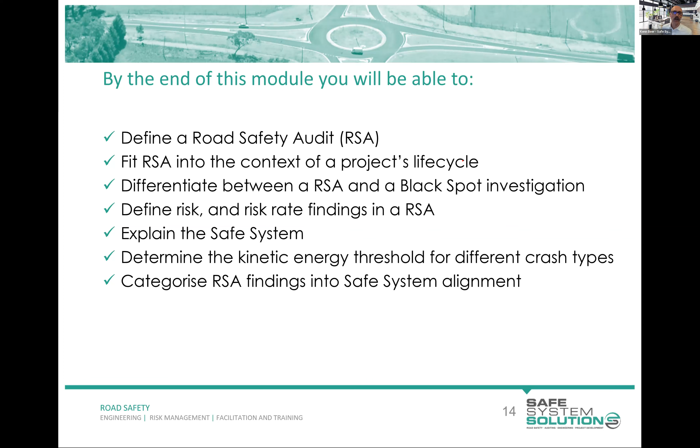This course follows the Austroads general syllabus for a road safety audit course, which is housed pretty much in the Austroads Guide to Road Safety Part 6, Road Safety Audit, which is this document here. I was the technical advisor to Austroads on that 2022 release of the document, working with a few people on that. There's been quite a series of these in the past, some of the superseded ones you can see there. But we will be following that process.

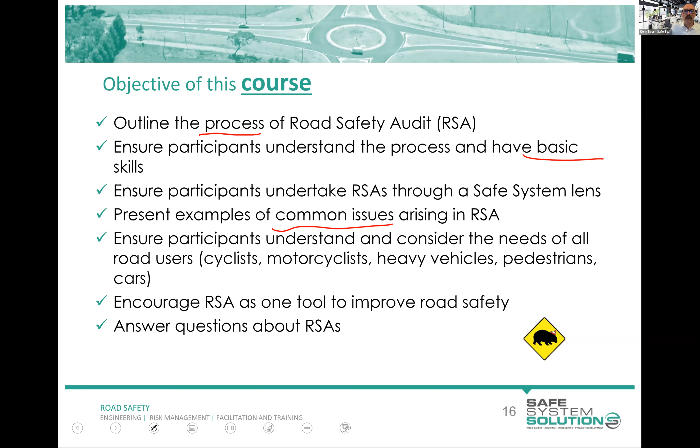Predictive techniques are more where you're taking crashes into account a little bit, and reactive are absolutely crash-based. So reactive techniques are often what people think about with road safety assessments, because they think, okay, there's been lots of crashes, or there's been a crash. Let's look at that and look at what happened, and then try to fix it.

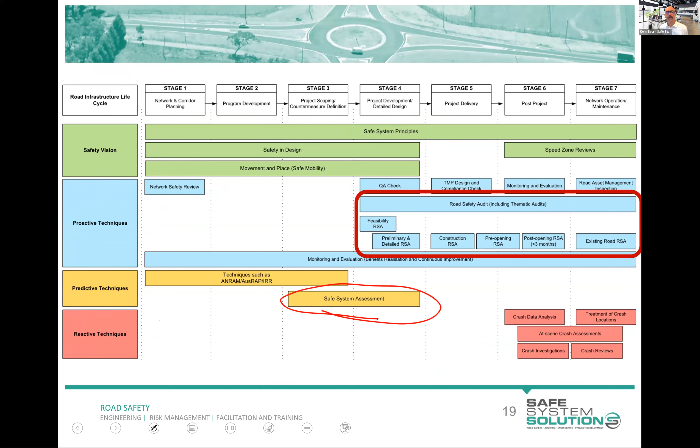We do interface a little bit with the Safe System Assessment Framework, but this is the road safety audit course. First, the most common misconception about road safety audits is that people think it's your job as an auditor to check that a design or bit of road meets all the standards.

And that is not what a road safety auditor does. The reason is that we know meeting all the standards does not necessarily equal safety. Why is that? You know, Austroads and Australian standards and local standards are surely good, but the reality is there's a few reasons why we know this.

Some standards have inherent deficiencies in them. They've traded off safety for other purposes, like mobility. Sometimes two standards in isolation all look fine, but when you combine them at a site, things go bad.

Another issue is there are many scenarios where standards don't exist - no standard or guidance on that particular thing. It could be an innovation, an area we've never used that particular thing in that scenario. So there are many circumstances where meeting standards could be unsafe, and many times where there are no standards or guidelines to follow.

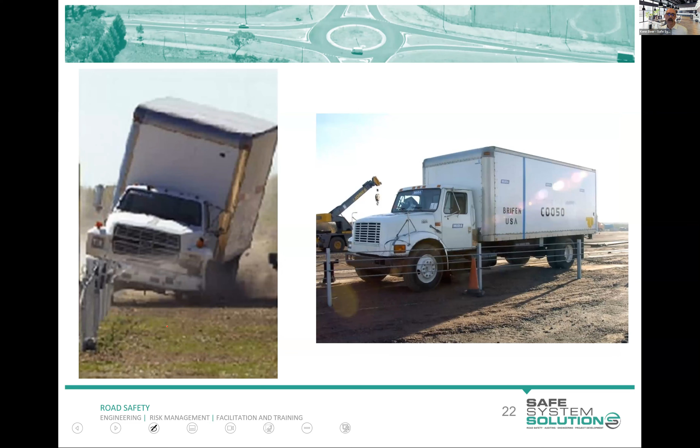So that's actually the test level 4 test vehicle. That's what we would expect it. And that vehicle we saw back there is going to be much heavier than that, especially if it's got cargo.

Let's do another little case study, because I think I'm really trying to hammer home this point of standards. It's not a check against standards, it's bigger picture thinking than that. So that one back there met standards. Let's have a look at this one here. So what we've got, some of you know this area. I'm using a couple of Victorian examples to kick us off, but we'll go other places, don't worry.

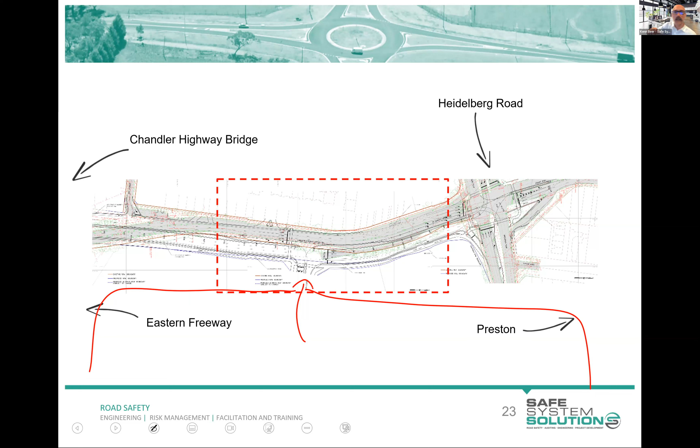We've got a massive new subdivision happening down here. Huge subdivision, apartments, townhouses, shopping centers, cafes. It's big. So they're building a new signalized intersection in here. We've got a bit of a duplication of the road happening as well, so an existing intersection here. So let's zoom in on this a bit. Okay, you can see down here, this is the new road that's being built, part of the subdivision. It's accessing onto this road with a bit of alterations.

And you can see there that little red square, if that was a car and say it was traveling at maybe 65 kilometers an hour, it's a 60 zone, but hey, that might be going a little bit fast. And they're ticking along and they're going straight through, and hang on, there's a right turn lane. They're just going straight along. They want to go straight through there. So that's what we would call a trap lane. If you're in a lane and without you doing anything, all of a sudden you are forced into a turn lane that you didn't want to be in, that's what we call a trap lane.

Trap lanes are something that is discouraged in guidance, but there is nothing here that does not meet a standard, okay, well, associated with that aspect of it. But again, we know that this is going to cause side swipe and rear end crashes around there. It's just, we know that. Now, our job as road safety auditors is to point that out.

Now, for a job like this, the designer is going to know that they have designed a trap. Pretty confident of that. This is not some accident that they've missed. I think the previous one, it was more probably they just didn't think through the specifics of larger vehicles, breaching it, hitting those specific things. There would have been some thought of that, and there would have been barrier design. But this one's more of, it was a conscious decision.

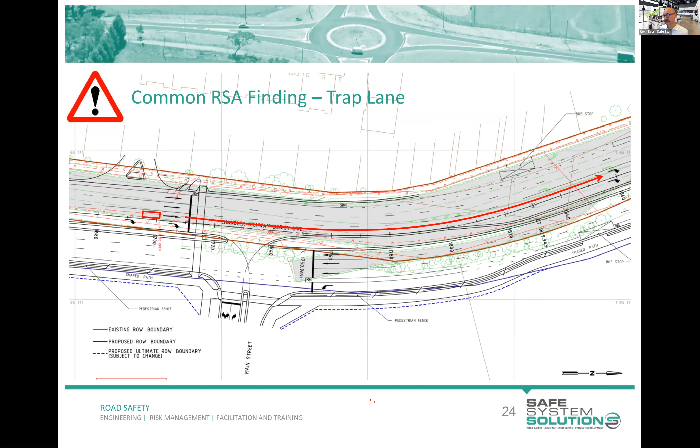All right, I'm going to give you a little exercise to do here. Before that, Marissa, I'll see if you've got any questions, but let me explain what we're going to do. I'm going to play a crash here. Nothing graphic, but there is a crash that's going to come up. Now, a road safety audit is not a crash investigation, so that's not road safety auditing. But what we're looking for are the features and characteristics of the road environment that may have influenced this crash happening. What features are there that may have made it more likely for this crash to happen? So, Marissa, were there any questions before I play this video?

No questions. We do have a comment from Paul: on Eastlink, surely heavy vehicle percentages would be fairly high and fully loaded - trucks and trailers more likely to be 30 to 40 tons.

Yeah, I think it's a really good point. It shows you that sometimes these standards or ways of operating and decisions made don't really consider the real world situation, or haven't taken things into account. Road safety auditors are one of the ways that we can address that. These days, in most jurisdictions, you'll find a requirement for higher containment around gantries that go over the road especially, and for a very long time, bridge piers and the like have required much higher containment barriers around them, where there's that catastrophic failure potential.

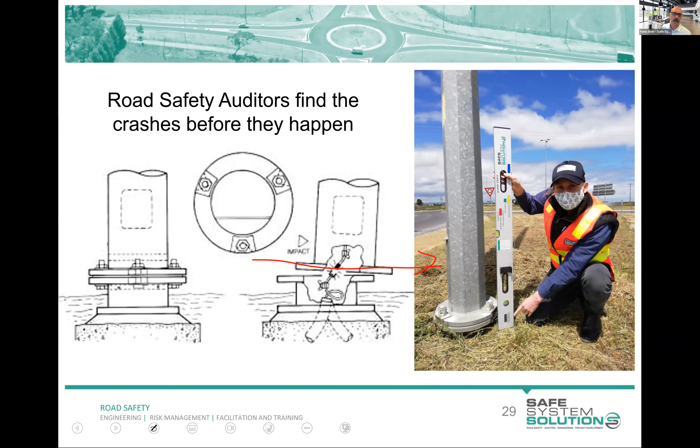And so as a road safety auditor, you'll probably be given a set of designs at some point, and you might get the full design set. You might get 50 pages, 100 pages of geometric, long sections, cross sections. You'll get the pavement plan, the drainage plan. You'll get the lighting plan like it is here, and you'll look at that and you'll think, okay, are we going to get any visual deceit at night? Is it going to make people think the road goes a different way? You'll also be thinking, oh, gee, what light poles are they using? And what's this environment? Are they using slip-base poles? Are they using rigid poles? Are they using another type of pole? And trying to understand what the implications of that are.

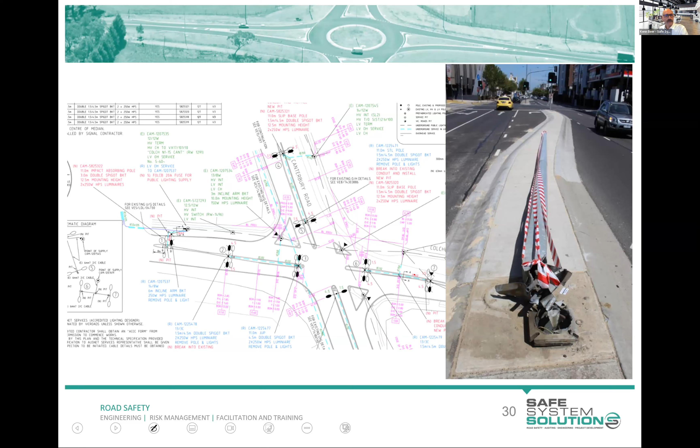So let's take this little bit of road environment down there in Abbotsford, Richmond. What about if they were to say, hey, yeah, we're worried about vehicles leaving the road, so our design has this one as a slip-based pole. What would you say to that as a road safety auditor? When you're looking at the design, you go, okay, they're using a slip-based pole there. It hasn't been built yet. Imagine that you're seeing it as a design. What would you be saying?

Oh, look at this. Marissa, two in, and I'll take those first two and give prizes. I think we're going to run out of prizes, Ken. Good. That's what I like to hear, because it means people are getting involved and coming up with good answers. And you've got to be quick here, it looks like.

We've seen danger to pedestrian. Yeah, so we've got to think about where that falls. And overhead cables is a good one as well to have a look at as a road safety auditor. So tram lines, power lines, and where are they going to fall?

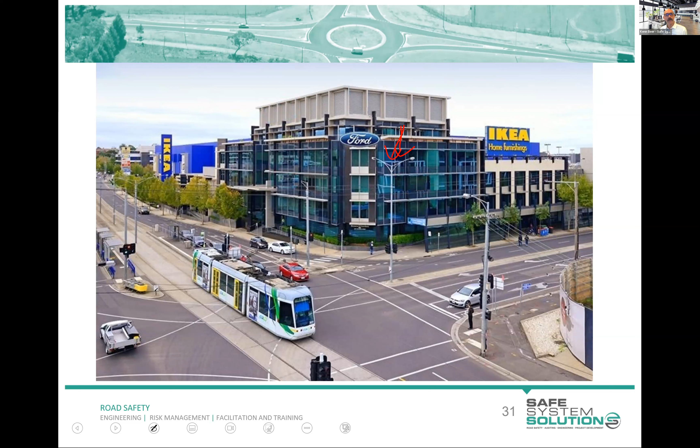Okay, so what we then have to do as a road safety auditor is think of all of this in context. And that's really what we all need to do across road design, management and everything - think about context. But we as auditors think about our risks within context. So in this context, slip-based poles would present a risk for pedestrians, for those power lines. It's probably not the appropriate treatment to be using at that location.

There is this other type of pole, which is categorized as frangible. I will give a prize out if anybody can tell me the name of this type of pole. But what it does is, instead of shearing at the bottom, it captures the vehicle, as you can see, in a contained envelope. It is certainly more forgiving, and it is an impact absorbing pole. That's good knowledge. Well played. Impact absorbing, prize there, please, Marissa. It contains it in an envelope.

But your rules of thumb are: low speed environments, especially if there's pedestrians and the like around, use a rigid pole, because your speed is low of vehicles, and we're not going to see a lot of serious injury and fatality to the occupants of the vehicles. Their speed's low enough with that rigid pole. Medium speed environments, you're looking at these impact absorbing style poles, and high speed environments are certainly into your slip-based poles. So again, as auditors, we can be injecting that thinking in and helping out. Now, a designer may come with absolutely good intentions, putting a slip-based pole in an area where we're concerned it's going to land on a bus stop or an area where pedestrians are waiting and the like.

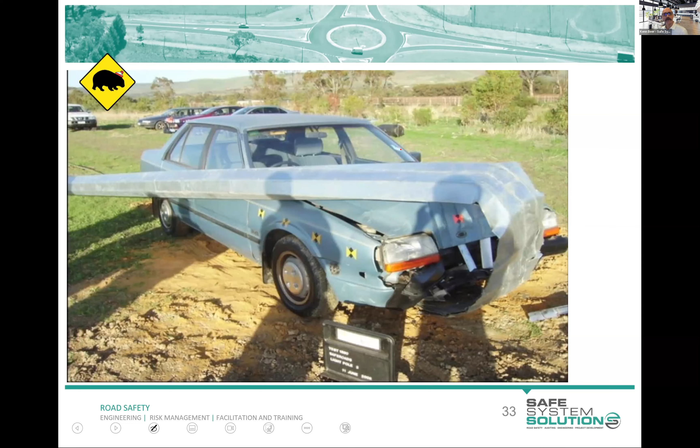So a couple of little tips here, and you'll see these little info things pop up. You can download an electronic copy of these notes, and if you click on these, you just get some extra information snippets, videos of vehicles crashing into slip-based poles and the like.

Some issues you'd look for as a road safety auditor: where are they going to fall? But also, if you're doing an existing road or a post-opening audit, as our auditor here, Max, is doing, he's out there with a colleague doing a post-opening audit of this roundabout, checking the height these were installed at. Because if you make that too low, well, too low is not as bad. Too high, vehicles snag on it, it's useless from a slip-based perspective. Too low is not great, but you can live with that a bit more. There's easily available information about the height it should be.

So if they selected the right pole, where's it going to fall? What's the height of the shear plane? Now, I just use that as one example of limitless possibilities of things we could be thinking about as auditors. It's one where it's nice to understand the technical nature of it, but also the logical aspects, and this is what we want road safety auditors drilling into. It's one I see come up a lot, especially that selection of slip-based or not, and where it would fall.

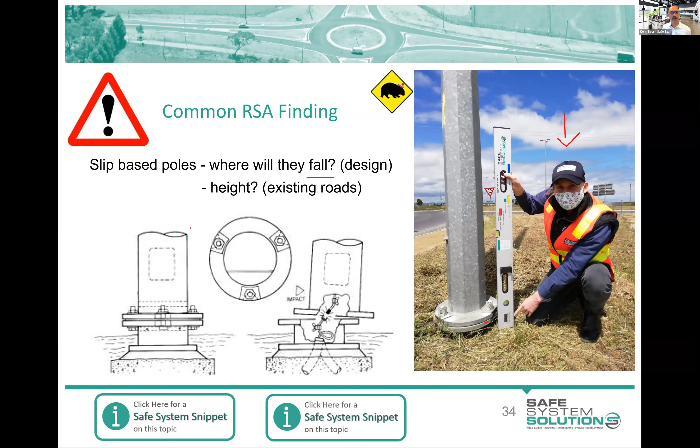So road safety audit is proactive. If you have a location with a significant crash history and you're asked to investigate that site, looking at all the crashes in detail, understanding what happened, you are doing what we call a black spot investigation. It is different to a road safety audit. They share a lot of the same thinking, and are best done with people with the same training and knowledge, but they are different processes.

A question that often comes up is, should I, as a road safety auditor, look at the crash history as part of my road safety audit? The answer is, it's up to you. Some people don't like that, but it is up to you. Austroads avoids answering that definitively. I have worked with road safety auditors who say, I do not want to see the crash history. And I've worked with auditors who say, yeah, absolutely, I want to see the crash history.

The reason some say they don't want to see the crash history at all is often because we're doing a design stage road safety audit. They say, what use is the crash history? They're fundamentally changing this whole setup. Why would I be influenced by what's happened on a completely different road setup? I'm going to look at this new design and imagine and predict what's going to happen, and that's what we're going to report. We're not going to be swayed by any crash history. Also, they'll often say, well, if a place doesn't have crashes, it doesn't mean it's got no risk. So I'm not going to look at crash history. I don't care about that.

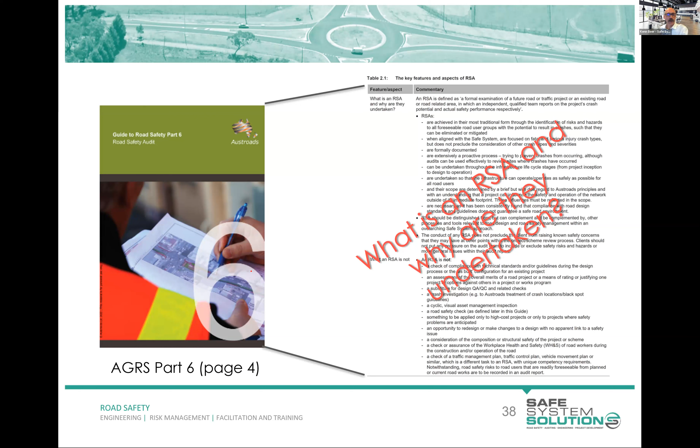I'm not going to read you a page. You can read it yourself because you can download a copy of the Austroads Guide to Road Safety Part 6 freely from the Austroads website, as all Austroads guides are. They are free, you just need to create a login, and there's wonderful information there. You should, if you aren't already, make sure you get onto that. But let me take one little bit of this.

A road safety audit is a formal examination of a future road or traffic project, or an existing road or road-related area, in which an independent qualified team reports on a project's crash potential and actual safety performance respectively.

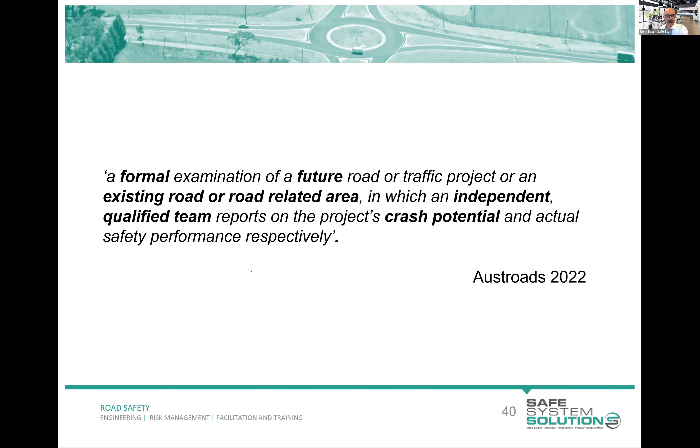Let me bold a few really important words here. It is formal. A road safety audit is a formal exercise. It's a set process, there's a way to present it, you sign it off at the bottom, you've got steps to follow. It's a formal process. Future road or traffic project, so that's designed, or the existing road or road-related area, independent.

You cannot do a road safety audit of your own design. You cannot do a road safety audit if you are the project manager, or even if you are the overarching manager of an area where the project is happening within that sort of area. You can't be doing the road safety audit. You must be independent.

You have to be qualified, and you're going through one of the important processes, doing a course, a recognized course, and then getting your accreditation of that jurisdiction. I'll take you through all of that in our last module. And we're thinking about crash potential.

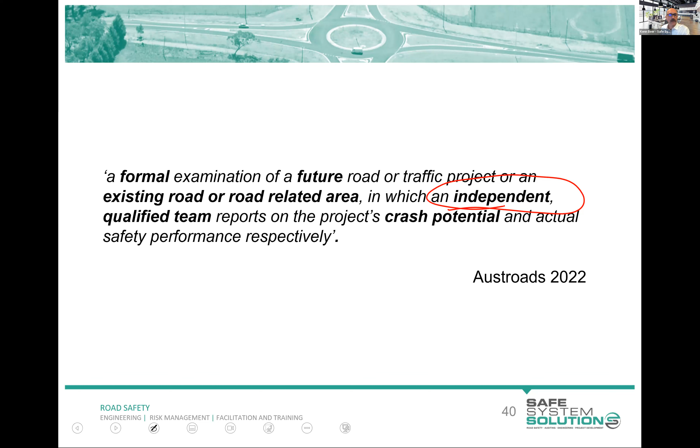So we want to ensure that we follow this safe system approach. Some of you have heard this a thousand times, but I'm going to say it again in case anybody hasn't, or just for reinforcement. We are now in a space in the design, the management, the operation of the road system that we do everything we can to stop crashes happening. However, we acknowledge that even when we get everything right, people are still going to stuff up. They're going to make mistakes. And we need to then understand what is the severity of that.

What's going to happen? We have a responsibility as designers, as engineers, as auditors and the like. We do want road users to act as appropriately as possible, but we recognize there's limitations because, hey, they're human, and humans stuff up and do silly stuff. And that's what we are designing our road network for currently. When we get to design it for computers and machines only using the road, great - different thing, different way to look at it, different way to design it. But for now, and for quite a long time, it's humans we're designing for. You can design a little bit for machines, but we won't get into that in this course.

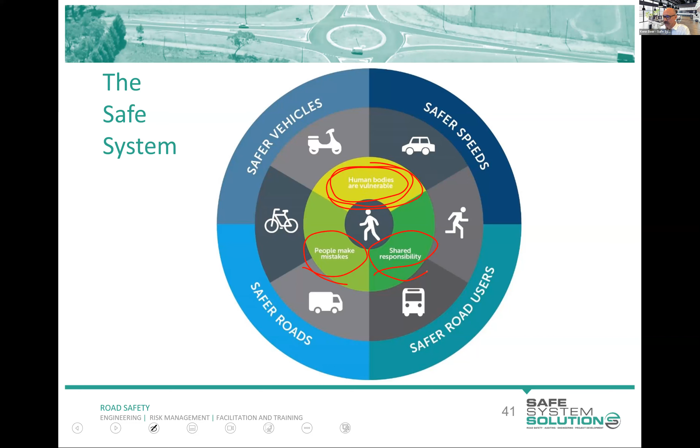So really key principles - we're aiming at no death and serious injury. We know that's not going to happen tomorrow, but we've got to think and aim for that, and stop just saying, well, it's an inevitable cost of transport that some of the community get killed or seriously injured. We challenge that whole premise. People make mistakes, we've got a shared responsibility, and we know that there's a certain amount of force people can take.

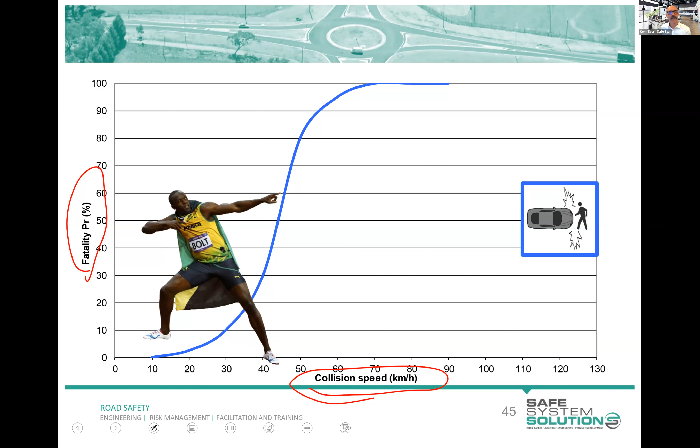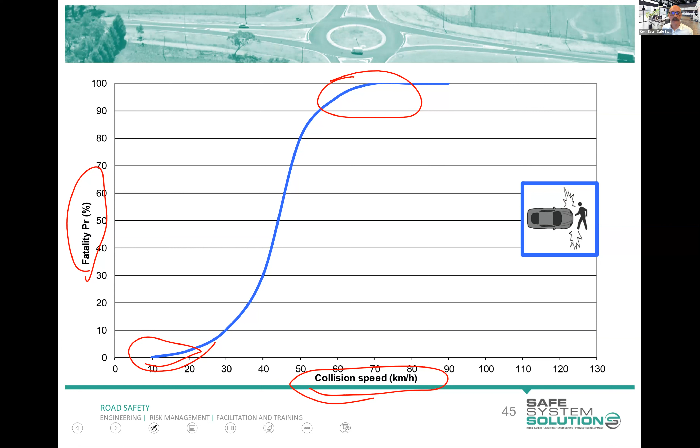So we see there that for our entire community, not just Usain Bolt, this is everybody. When we have very low speed, 10, 20 kilometer per hour vehicles hitting pedestrians, most people survive. When it happens at 60 or 70 kilometers per hour, most people are killed. There's going to be situations at either end which are anomalies, but that's the general trend.

This is what we're designed for. Yeah, he survives, there's got to be a few broken ribs in there. Yeah, he did break some ribs actually, and came back and won the gold medal the next year. So we can survive off the speed of our own legs. But we, of course, are propelling things and propelling ourselves around the transport network beyond what we were ever evolved to survive, and so we need to have a think about that.

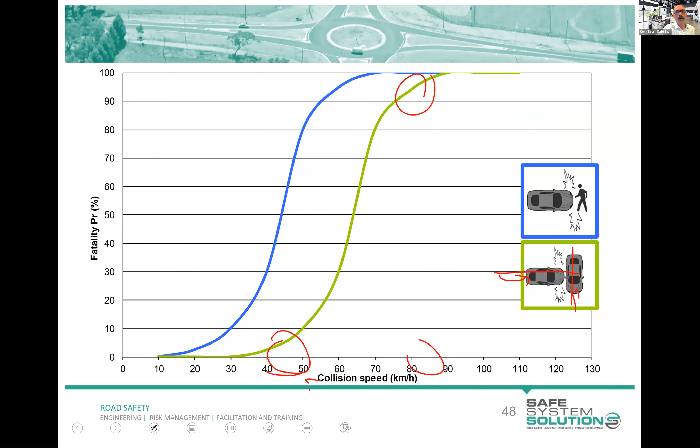We have this information for some other crash types. We have side impact crashes, so that's the bullet vehicle - the bullet vehicle is the one that does the damage - and the target vehicle. This is bullet vehicle speed. Bullet vehicles around 40 or 50 kilometer per hour in a right angle crash, it's fairly survivable. Up at sort of 80 kilometers per hour, it's not survivable for the occupants of the target vehicle. And head-on crashes, it's somewhere around 70 kilometers per hour speed of each vehicle, where we see things go really bad really quickly.

So in a road safety audit and in safe system thinking, we talk about a threshold speed, and it's this line here: 30 kilometers an hour for pedestrians, 50 kilometers per hour for side impact, 70 kilometers per hour for head-on crashes. That's where things start to go really bad really quickly after that speed for those crash types. So that's what we talk about - is that within a safe system threshold speed for the crash type we're worried about?

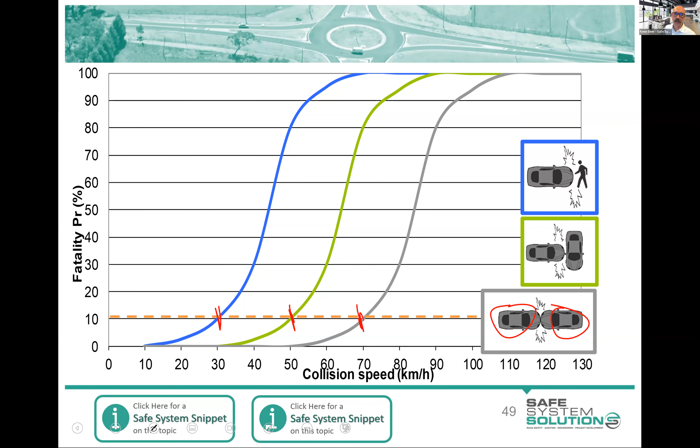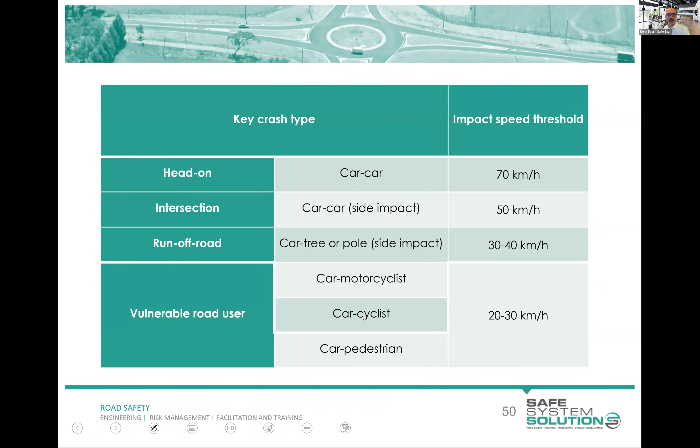There's some safe system snippets, links. If you download the PDFs, you can have a look and read in a bit more detail about this, and there's lots and lots of continued research going on to this, but these are a pretty good starting point. I've given you a few more here, and a few more sort of impact threshold speeds for different crash types, and you may be referring back to these at different points.

Okay, so we're sort of getting our head around what a road safety audit is. The old model of road safety auditing just said, okay, find the risks in the design or the existing road, make some assessment of how bad, how much of a risk is this, and then recommend some changes. Nowadays, we have to do a little bit more. We still identify those risks, we still assess them, make a risk rating, but we sort of consider that safe system tolerance. When we're assessing that risk, are we talking about fatalities here, or are we just talking about minor injuries? I'll show you why, even though we assessed risk back here, it's slightly different.

And then we want to recommend safe system aligned mitigation measures - things that are going to actually see fundamental risk reduction. The easiest way for me to explain this is just run you through an example from start to finish of an audit finding and recommendation, meeting the Austroads guide.

So here we go. This is a new intersection being proposed. It's a design, there is no intersection there at the moment - this is a new intersection coming in. It's got a left turn lane here, it's got a through lane here. This is a high-speed road, an 80 or 100 km/h road. You can see there, it's all set up, being designed, it's all looking pretty good.

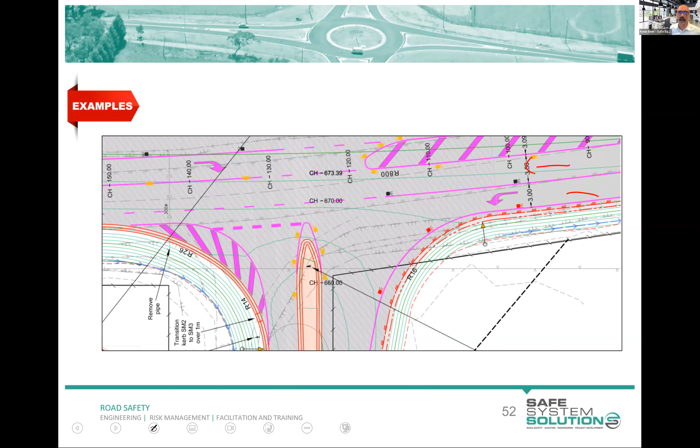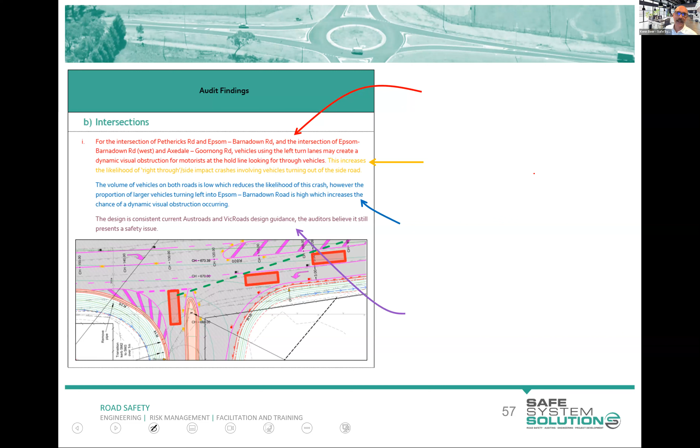The red is the issue. So for this intersection, blah blah blah, vehicles using the left turn lanes may create a dynamic visual obstruction for motorists at the hold line looking for through vehicles.

Then the yellow is the crash, okay? This increases the likelihood of right through side impact crashes involving vehicles turning out of the side road. You spell out the crash that you're concerned about.

Even if it's blindingly obvious to you, you spell out the crash that you are concerned about. Okay? If you can't actually articulate a crash, it's not a road safety audit issue. If you're worried about drainage off the side of the road in the carriageway, flooding houses, okay, what is the crash? Can't find the crash, it's not a road safety audit issue.

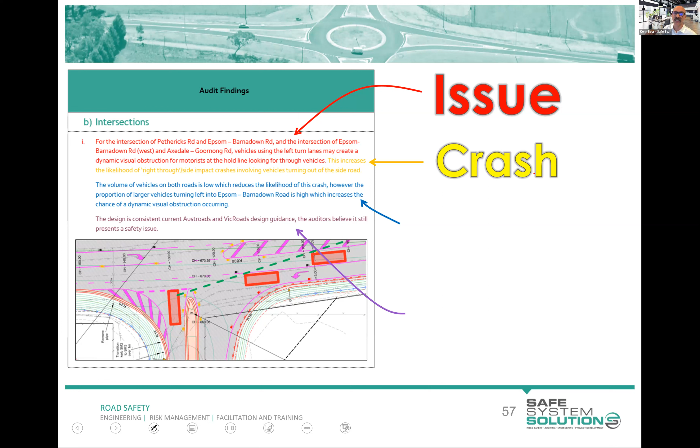Maybe it's a drainage issue, and maybe you want to shoot an email to the designer and say, hey, I reckon you're going to have some significant drainage issues. If you can't relate it specifically to a crash, not a road safety audit issue.

Then the blue is any factors that may increase or decrease the risk associated with this site in this context. The volume of vehicles on both roads is low, which reduces the likelihood of the crash. However, the proportion of larger vehicles turning left into Epsom Barnadown Road is high, which increases the chance of dynamic visual obstruction occurring.

And the last thing is any standards or guidelines that are applicable. You don't have to do this, okay? But if you know that it doesn't meet a standard or a guideline, this is where you would say it.

Now this one, interestingly, the audit team has done something which isn't as common, but it's decent practice to do it. The design is consistent with Austroads and VicRoads design guidance. The auditors believe it still presents a safety issue. So there you go, they're already going, yeah, we know you've met standards here. We're still concerned, okay, that's an interesting one.

So that's a good, nice write-up of an audit finding. Issue, crash, risk factors, standards or guidelines if applicable.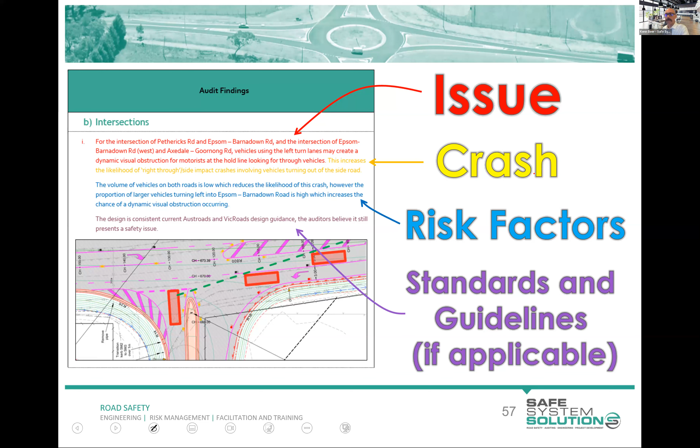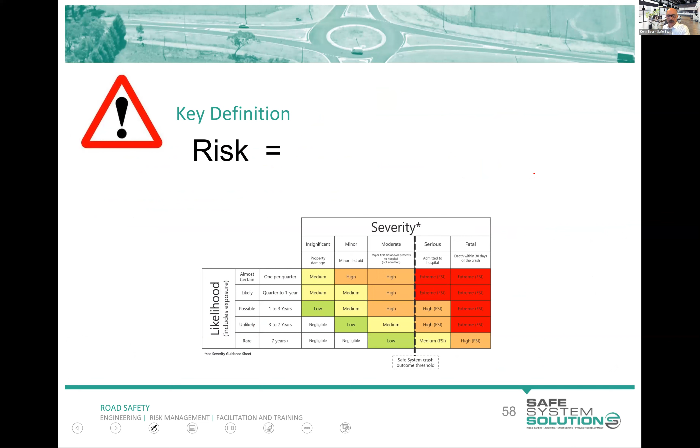So then we need to give it a risk rating. We've explained it, now we need to risk rate it. Is this low risk? Is this high risk? What are we talking about? And the formula for risk is the chance of the crash, the likelihood, multiplied by the severity of how bad it's going to be. Now, for those who have done safe system assessments, we extract exposure out of likelihood.

And you can see here, actually, go to the next page. You can see here, this includes exposure, which we added in the most recent thing to just clarify that.

This is straight out of the Austroads Guide to Road Safety Part 6, which we've updated since earlier versions. I was never involved in the first one back 25, 30 years ago when it first came out, and I've never liked it. So this time I made sure we updated it.

What we can see there is that you try to find, okay, you're imagining a crash that could happen. So on this one, we're imagining that dynamic visual obstruction, that side impact crash. We're saying, how often is that crash going to happen? Is it once every quarter, or less than once every 7 years? And when it does happen, what are we talking about? Is it going to be insignificant, just some property damage, or is it going to kill somebody, or where does it sit?

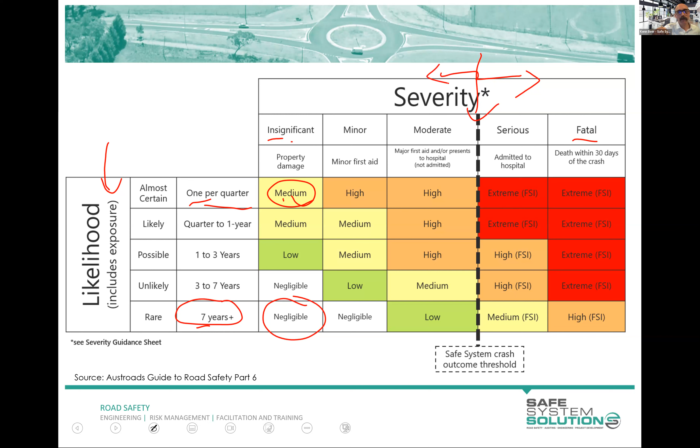Then you find your corresponding risk. So maybe once a quarter, insignificant, we put that at medium. Or 7 years, insignificant, we call it negligible. You find this corresponding risk, and you see this line here - anything to the right of that, we're very concerned by. Anything to the left of that, we're still concerned by. But if we have a high risk here versus a high risk here, this one is more concerning because of that FSI, which stands for fatal serious injury. The objective of the safe system is to eliminate that fatal serious injury. We don't want it, but if we had to, people having moderate injuries that they recover from is more acceptable.

Now, Marissa, are there any questions coming in at this stage? Yeah, absolutely, we have a couple. Would you reference speed limit which impacts consequences?

Yeah, you would definitely be. That would be a big influence on the severity of crashes or consequence of crashes, and the speed things are going to happen at. Absolutely, so speed limit, operating speeds, or your prediction on speeds can be very useful and can be added in there.

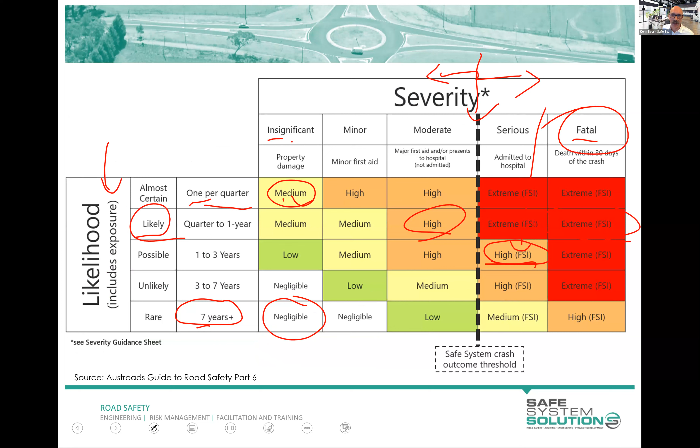So you can sanity check yourself by working backwards. Because if you've said, for example, I think this is likely fatal, extreme risk, if you come back in 5 years' time and they build it exactly the way it is, you're thinking there's going to be a minimum of 5 people killed, or could be more than 5 fatal crashes as a result of that at this location because they built it exactly that way because of that particular issue.

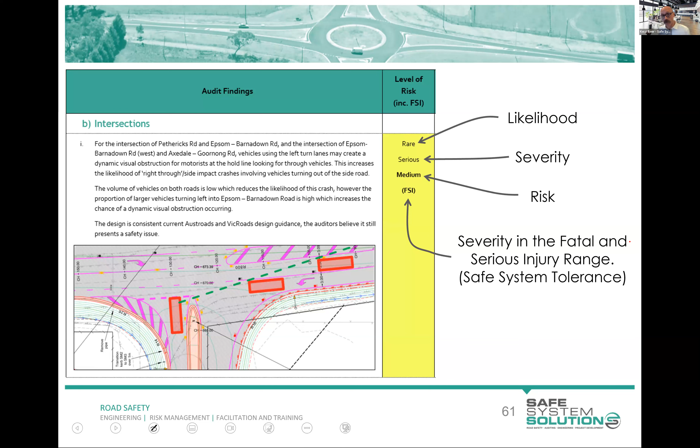Now, I would say that's over-risk-rated compared to what industry would say on this. Anyway, but I keep ticking on. And Marissa, hopefully you're getting assignments ready for everybody.

After we've risk rated it, we need to suggest how we can minimize that risk. How do we bring that risk down? We can do that in many, many ways. So how do we help the person receiving this report know which would be better to do, and which would be okay, but not the best?

Well, we do that by putting a little categorization of any treatment into either a primary treatment or a supporting treatment. I want you to think of these as little buckets or bags of treatments. In the primary treatment bucket, there might be a whole lot of different things they could pull out and use. In the supporting bucket too. It's just that the primary ones are our big ticket items — they virtually eliminate the potential for fatal or serious injury crashes occurring, associated with foreseeable crash types. Types is the important word there, crash types. Supporting treatments are good, they reduce risk, but they're not expected to virtually eliminate the potential for fatal or serious injury occurring.

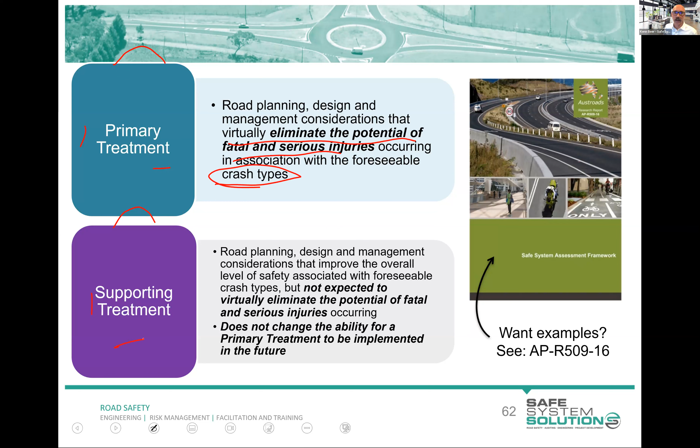So let's have a look at this, and we go back to our one here. Implement measures to reduce speed and/or angle at this intersection — this could be achieved with a roundabout, which is a primary treatment. If this cannot be achieved, implement measures to improve sightlines at this location, such as increasing the offset of the left turn lane, opening up sightlines — that's a supporting treatment. Relocating the hold line forward, provided that can be done safely — also supporting. You could have 3 primary treatments put in there as your recommendations, you could just have 1 primary treatment, or you could just have supporting treatments. It's just helping whoever reads this know which the big ticket, best ones to do could be. But you'll note there that there's a few things.

They've given some options — I like that. Some auditors aren't so keen on giving options; they just say, no, this is what you should do. I like doing it this way because it's not our project, we don't know all of their constraints. In fact, they're probably locked into a budget and locked into a land area. And the idea of that roundabout, while it is the primary treatment that would really fundamentally eliminate this risk, they probably can't afford to do it and probably can't get it to happen, right? But I don't want to ignore that, and I do want something else there.

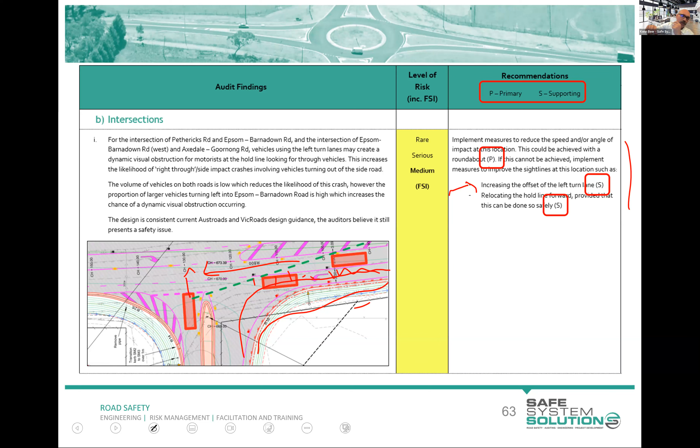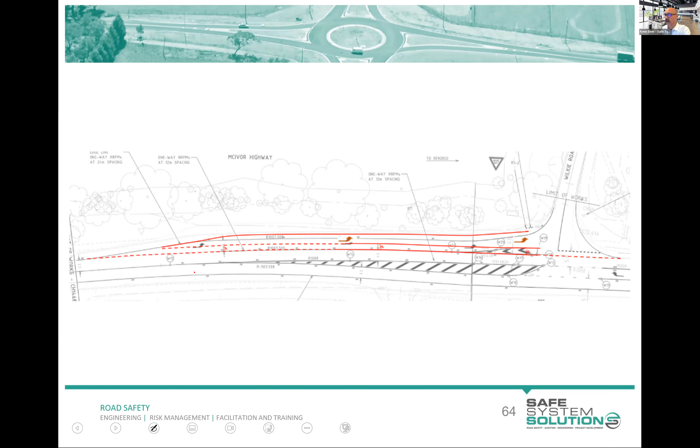I was reviewing two colleagues who had done a road safety audit, and they were very nice and extra helpful to the designers because they sketched up this little option to open up that sight line for the dynamic visual obstruction issue, and made it a cycle facility as well. I thought that was quite a neat little way to do it.

So a little tip: for something to be a primary treatment, it's really got to address the consequence of the crash through speeds, angles, barrier systems or the like, or it's got to virtually eliminate the possibility of that happening, but you've got to account for human error. So it's very hard to get that second one in play.

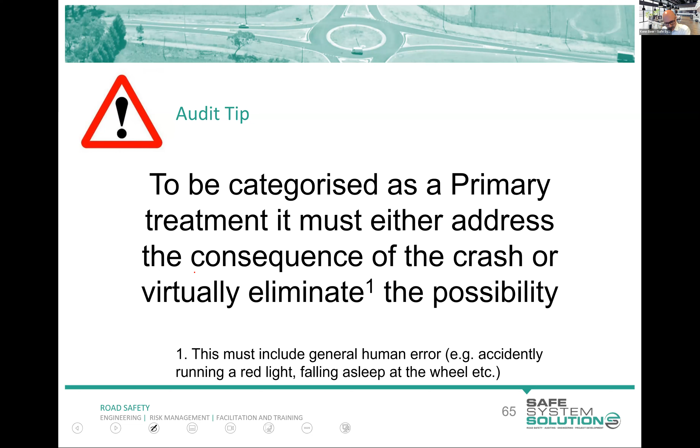You're probably going to have some challenges getting your head around this primary/supporting distinction. You're going to have a quiz later on, which is going to help you with some of that. You're going to get more examples, some practice, and some feedback. We'll work you through that.

So in your road safety audit, you'll always leave some blank spaces there for somebody to deal with that audit report. We hand it over, we want them to do something with it. We want them to look at this and go, oh yeah, that's an issue, we should do something about that. Or they can say, I disagree, okay that's fine, that's up to them. We don't have any legislative power as road safety auditors.

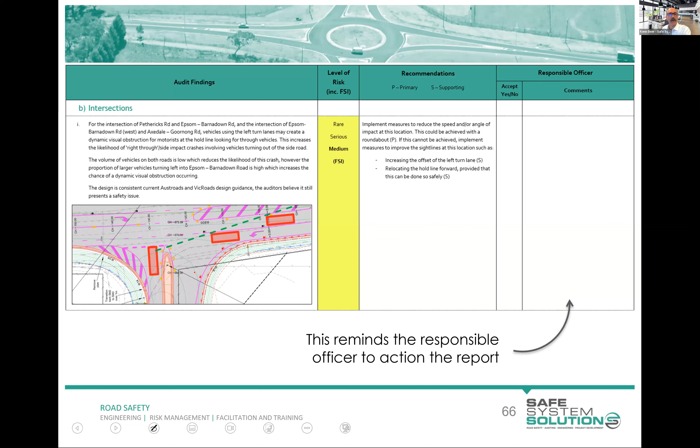We're not there, they don't have to follow what we say. It's not a good look in court when a road safety audit report said something and they didn't do anything, but they don't have to. My tip for anybody who doesn't follow what a road safety auditor has put down is to just justify why you're not doing it, and then that's seen as okay.

So there was an example, and I'll probably just jump through this one. I won't read it all out, but I love that straight away I know what the issue is: the 2.9 metre wide right turn lane. That's going to cause some sideswipe issues and possibly some rear end issues. And that's because they snipped the design, I know exactly where it is.

They pointed at it, I know what the concern is, I don't have to read this. And that's really important. They do, though, if you read it in detail, break it up into those specific recipe or formula elements I talked about: the issue, the crash specified, the risk factors. And this one has discussion about what Austroads actually requires, because it doesn't meet the Austroads guide to road design.

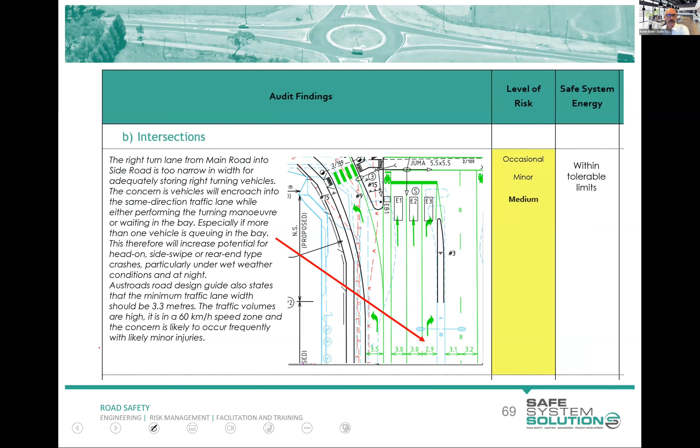I'll jump through that because we're a little bit out of time. There's another Wally—keep your eyes peeled for Wallies.

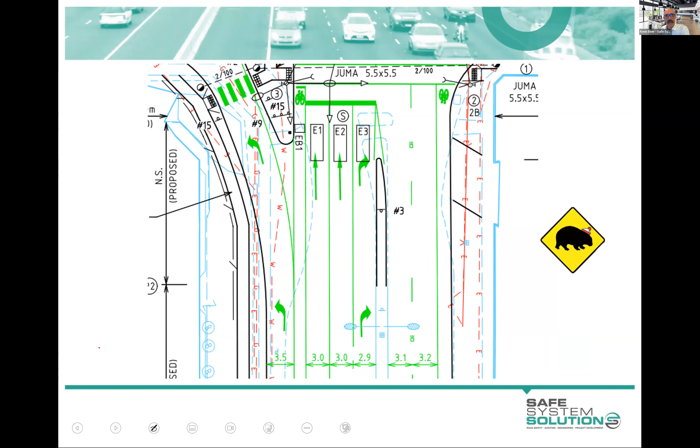Yeah, what we often see road safety auditors doing is very poor practice in terms of writing up a road safety audit. For example: 'right turn bay is too narrow.' Too narrow for what? Which right turn bay? I've got so many unknowns about that. That's just going to be annoying for whoever gets this report.

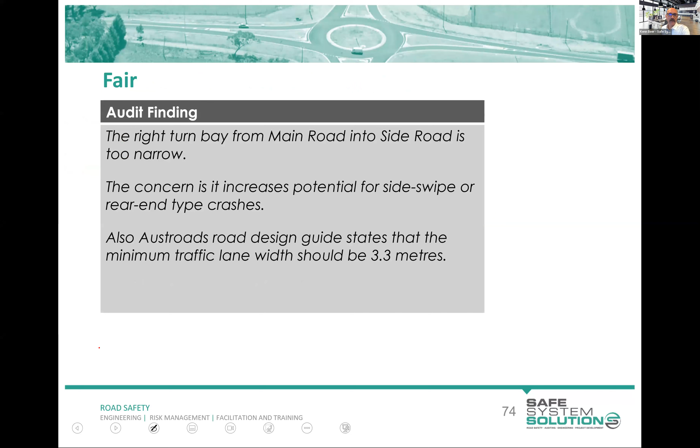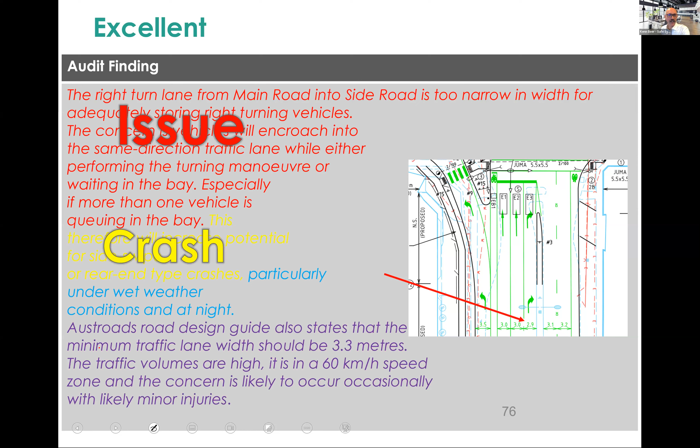Okay, this is better—we're talking about which one it is and what some of the issues are. But this one, which was shown before, is the comprehensive, well thought through, well worded, nice snip of the design, well articulated. It's got all of those elements: the issue, the crash, the risk factors, and the standards and guidelines if applicable. Follow that formula.

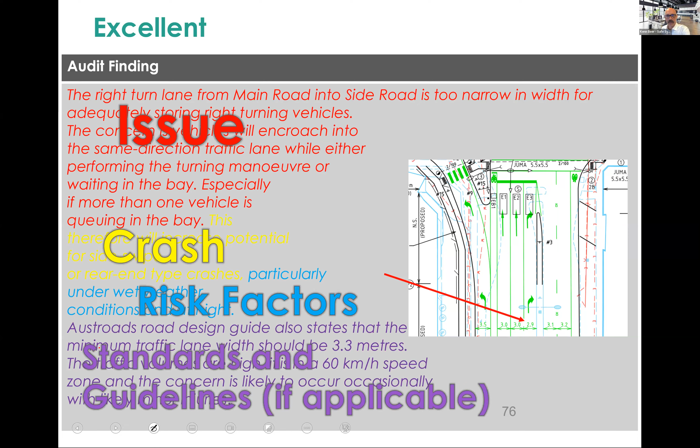All right, so road safety audit. It's a term that's sometimes used for things that it shouldn't be used for, like checks against standards and guidelines, or making judgment calls on the overall merits of projects.

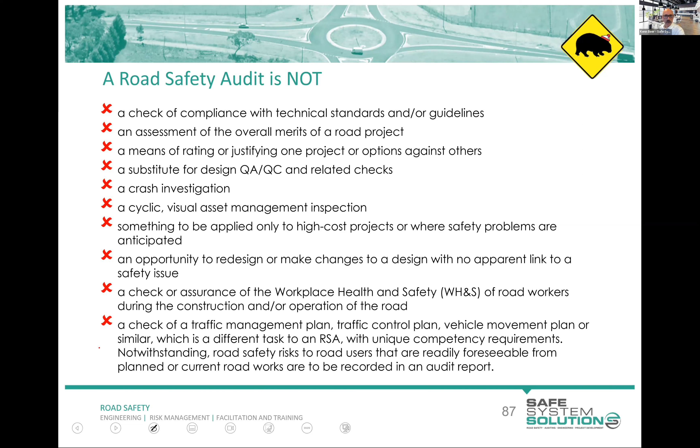That road safety audit, as we've clarified, is a specific process and it's got that specific lens on it. I'm happy to answer questions as we go through this course on it, or you could email me at any point.

A road safety auditor is a problem finder, and this is a very hard thing for a lot of people to get out of, the problem solving mentality. What I often see is people write in the audit finding something like, this intersection should be signalized. I'm like, whoa, hey, okay, you have obviously found some issue and then solved it all in one, because that's not the issue, right? That's a solution to some issue you need to articulate. Our job is to find the issue, and then we can suggest some stuff. That's added benefit, added bonus for the receiver of that report, that we're helping them try and solve this. We are the problem finders, okay?

And I just popped this up in our last couple of minutes. Road safety audits versus design reviews, because a lot of you might be thinking, well, I get people to check my designs. And there's some overlap there.

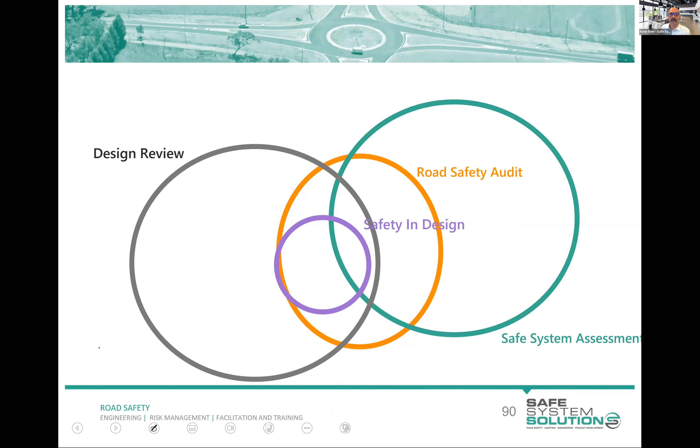There certainly is, but road safety audits find other things, checking things that maybe conform with standards and concerns with those. Safe system assessments overlap as well, they've got some similar characteristics. We've got safety in design, which is a different thing. We've got Disability Discrimination Act audits and reviews. So we are seeing quite a few different ways to look for safety in projects and the like. But at the moment, they all are fairly overlapping, but they all have their own unique characteristics.

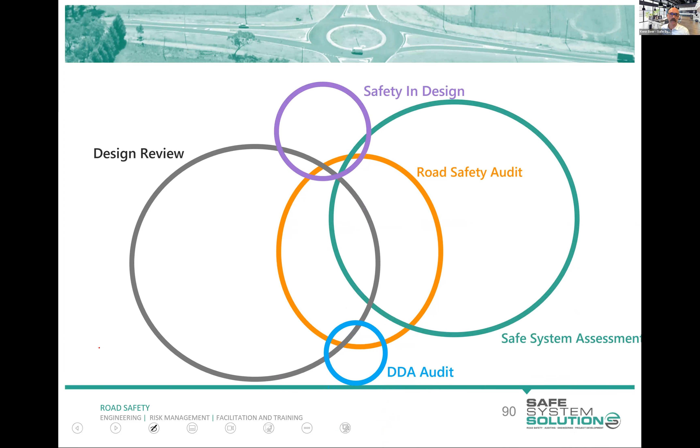So what can we audit? Well, anything that interacts with a road is a pretty good way to sum it. Big projects, small projects, construction sites, innovative stuff. Even car parks, absolutely, they can be road safety audited. Shared path facilities, off-road bike path facilities, can all be road safety audited.

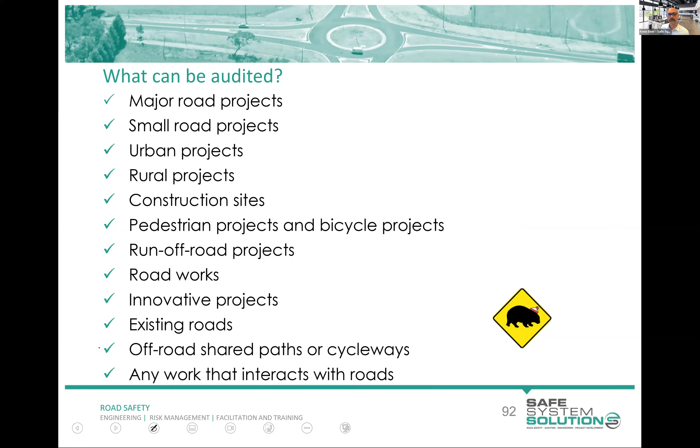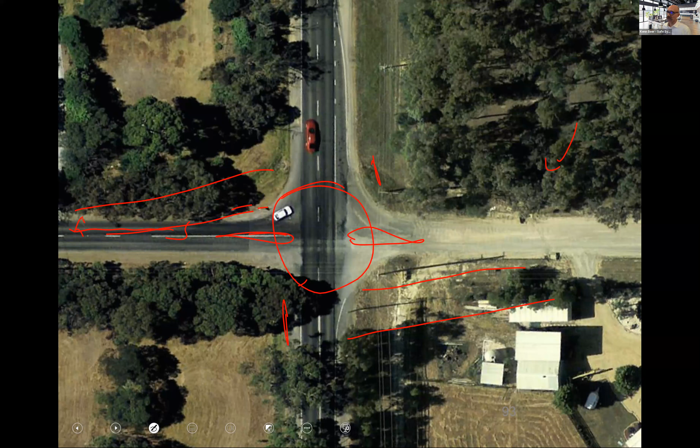So I think that's probably a good point to leave it. I'll come back to types of road safety audit at the start of the next module, because I want to make sure we've got enough time to talk you through this assignment and help you have a look at the learning management system.

So now, Marissa, do you want me to bring that up or would you like to bring that up? I'm happy to bring it up, Ken. I've got some things I prepared earlier. Right, let's just bring up the correct page. Sorry, just give me a second.

Okay, can you see my screen, Ken? I can now. I was trying to read your email very quickly, but I didn't quite get there. Nothing too exciting, I promise you.

Okay, this is the learning management system, eh? Yeah, so this is our amazing learning management system, this is our course. If you've logged in, you would be familiar with this page. We have a number of folders already set up. We have some reference documents and resources in here that you're welcome to flick through online. We have some course information here, the agenda and the Zoom document as you would have already received.